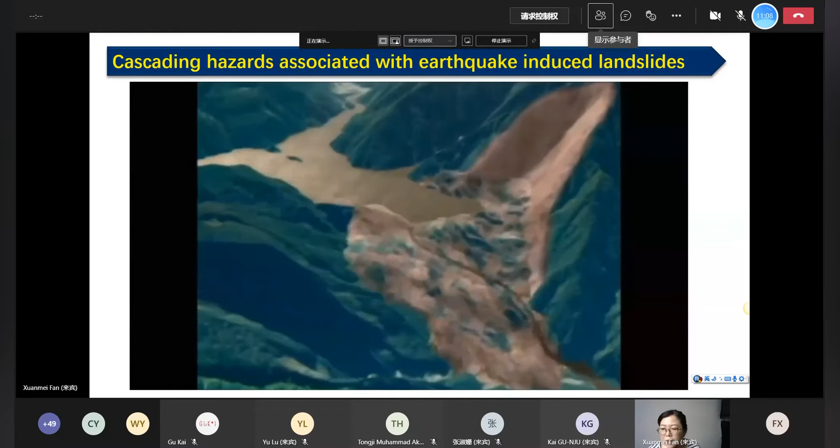Some of the landslides in the vicinity of rivers can trigger landslide dams. These dams are quite weak, especially when dam breaking occurs, causing problems. This is just a piece of animation to give you a direct feeling of this type of earthquake-induced chains of geological hazards. Some landslides in the vicinity of rivers can block the river and form landslide dams, and these dams can fail, especially during heavy rain, causing further flooding.

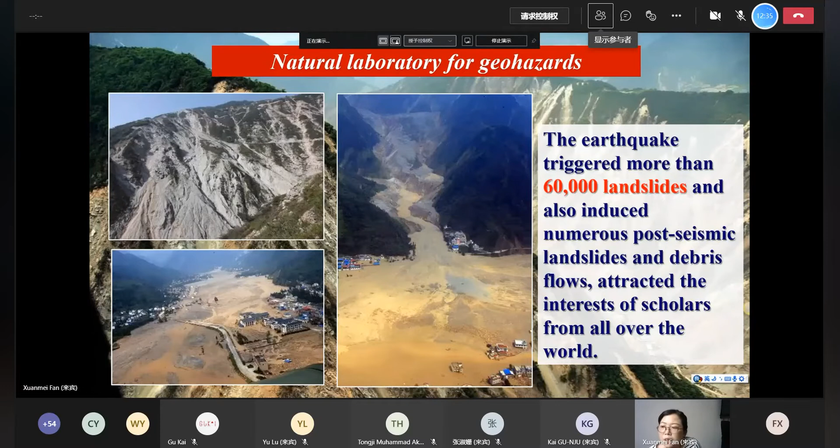This slide shows the situation of the 2008 Wenchuan earthquake. This earthquake occurred in 2008 in the southwest part of China, with magnitude 7.9. It killed about 87,000 people, and 1/3 of the total death toll was actually caused by landslides and secondary geological hazards. This earthquake triggered more than 60,000 landslides and also induced numerous post-seismic landslides and debris flows. That's why it has attracted attention from all over the world.

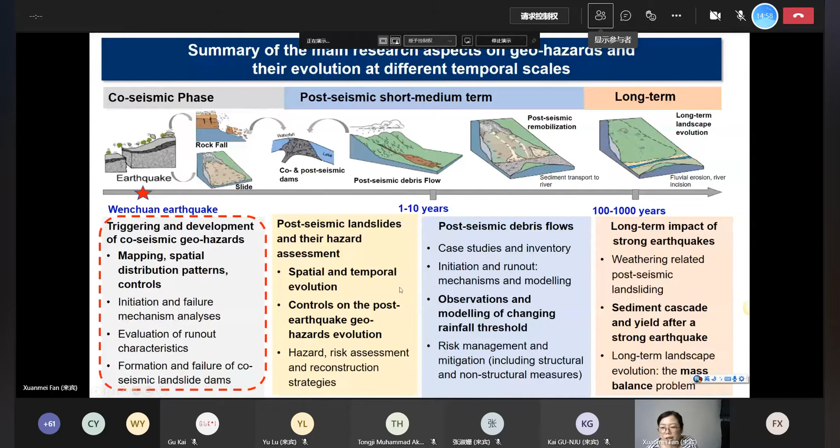Since 2008, I have been working on the chains of geological hazards, and I summarized it here. First, we were working on coseismic landslides. By coseismic, I mean when the earthquake happened, it simultaneously triggers some geological hazards. So we did an inventory and analyzed the spatial distribution pattern and their controls. After that, we moved along the timeline to post-seismic landslides and post-seismic debris flows. I will give you a short overview of all these stages in the coming slides.

First of all, we are trying to understand why an earthquake can cause so many landslides and what is the spatial distribution pattern of these landslides. We found there are 3 types of controlling factors. The first is seismic factors: distance to fault, fault type, hanging wall effect, and footwall effect. These factors are important, along with terrain factors like slope and internal relief. Geological factors include lithology, soil type, and geological structure. And hydrological factors are extremely important for landslide dams.

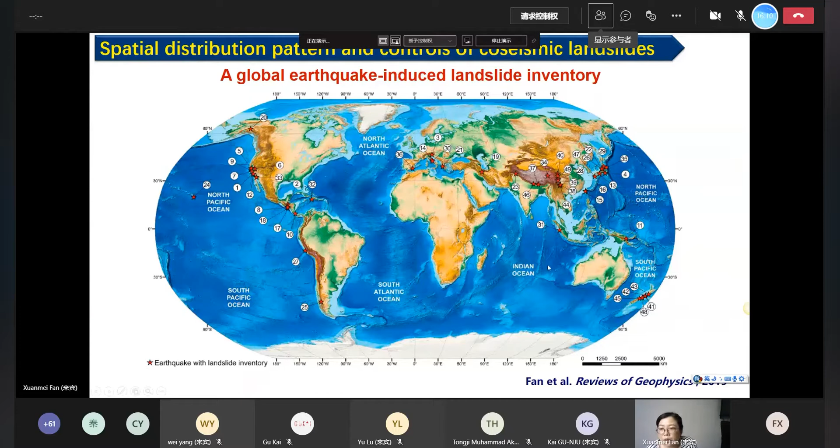And we also further created an inventory for global earthquake-induced landslides. This inventory includes 49 earthquake-induced landslide events, and this is publicly shared with the USGS data repository.

And based on this global earthquake inventory, we further analyzed and we found some general rules for earthquake-induced landslide spatial distribution. As you can see from here, most of landslides actually are concentrated on the hanging wall of the thrusting fault. And it also has a very strong distance effect. Within 5 kilometers of the fault, the landslide density is highest, and with increasing distance to the fault, the landslide density decreases.

And we further developed a model to predict, when an earthquake happens, where the landslides will most probably be. This model used artificial intelligence methods based on this global earthquake-induced landslide inventory. To give you a quick summary of this model: anywhere an earthquake happens, we can quickly predict where the landslides are most probably going to happen.

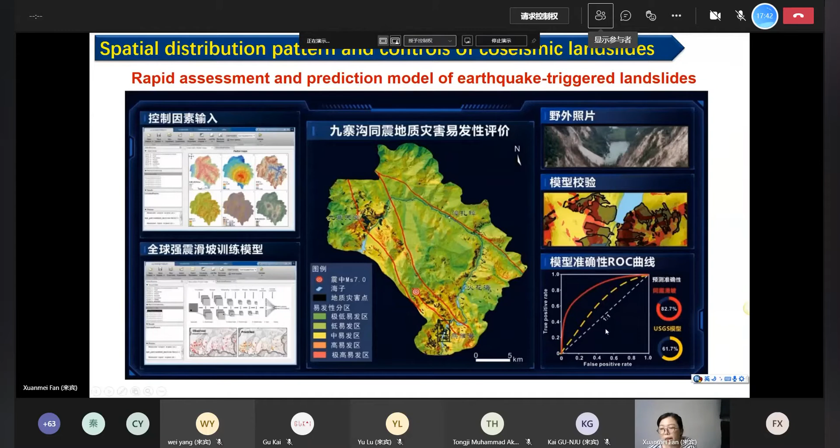This figure shows that after the Jiuzhaigou earthquake, we did a quick prediction of co-seismic landslides, and the model did quite a good job predicting the location of co-seismic landslides. Moving from the co-seismic stage to the post-seismic stage, after the earthquake, our government is facing serious problems with post-seismic landslides and also debris flows.

So the key research questions we are trying to address here are how to quantify the evolution of post-seismic geological hazards, understand the pattern and trend of that evolution, find the possible controlling factors, and also create prediction models for future landslide hazards in the region.

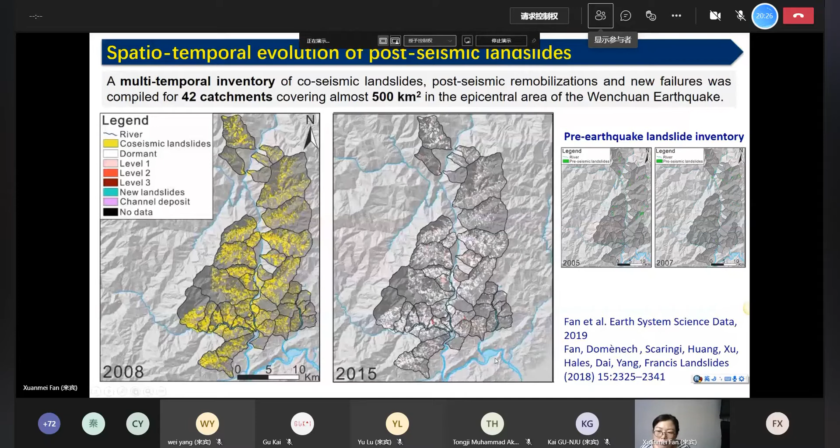And we did this again for 2015, 2017, and 2020. I did not show the other inventories. We also mapped the pre-earthquake landslides, 2005 and 2007, for comparison. If I plot all these inventories as volume density, you can see before the earthquake this region had quite low landslide density, and this is the coseismic, earthquake-induced landslide density. After that, the density decreases, and by 2020 the landslide density seems to have already returned to the pre-earthquake level.

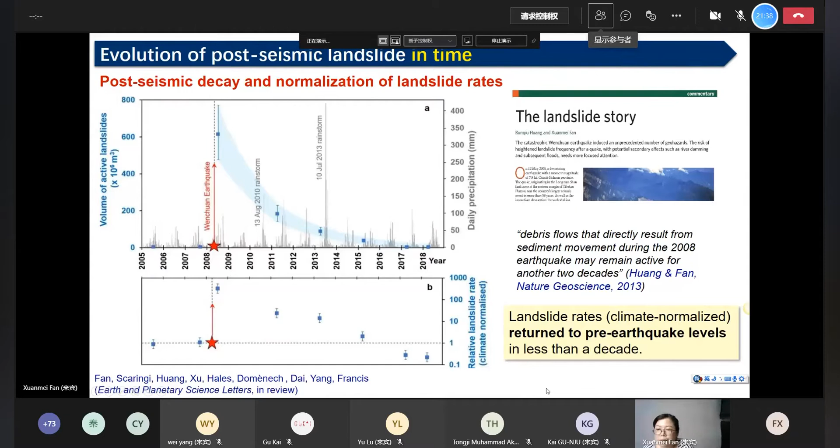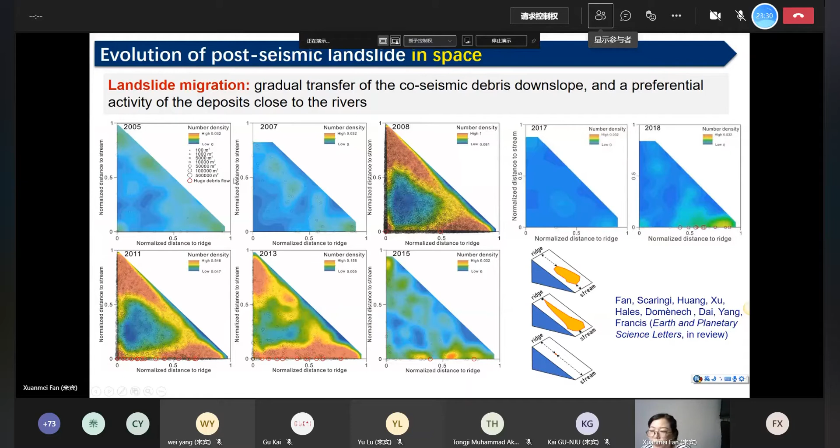So we are trying to understand why the landslide activity decayed very quickly after the earthquake, let's say within 10 years, it already returned to the pre-earthquake level. And we found one of the controlling factors is what we call grain size coarsening. So we found some field evidence.

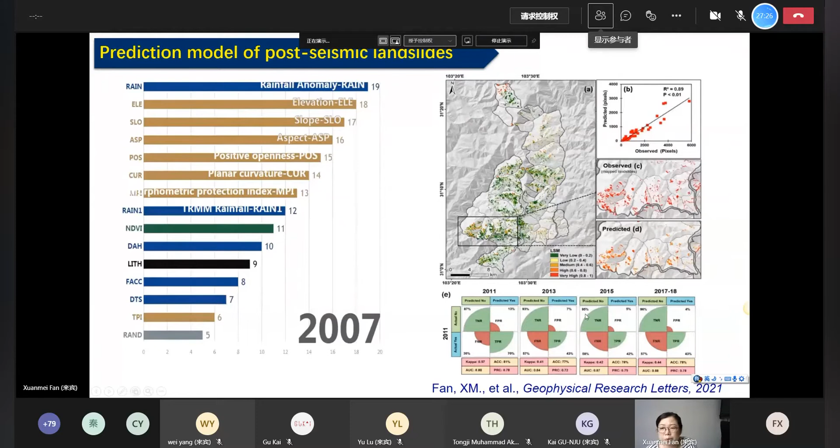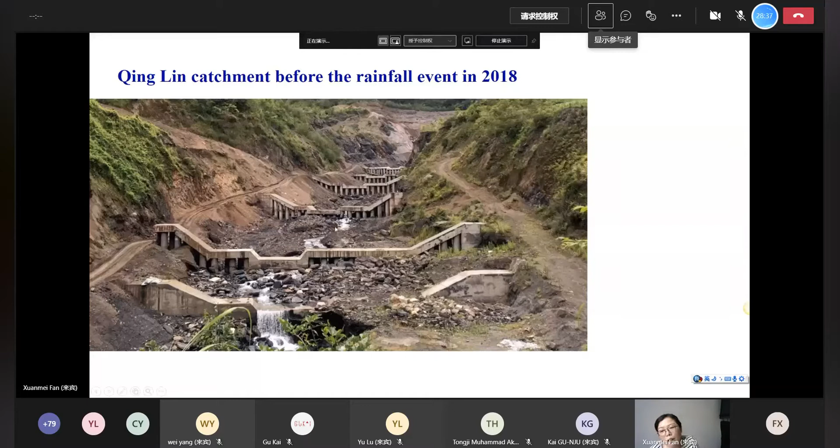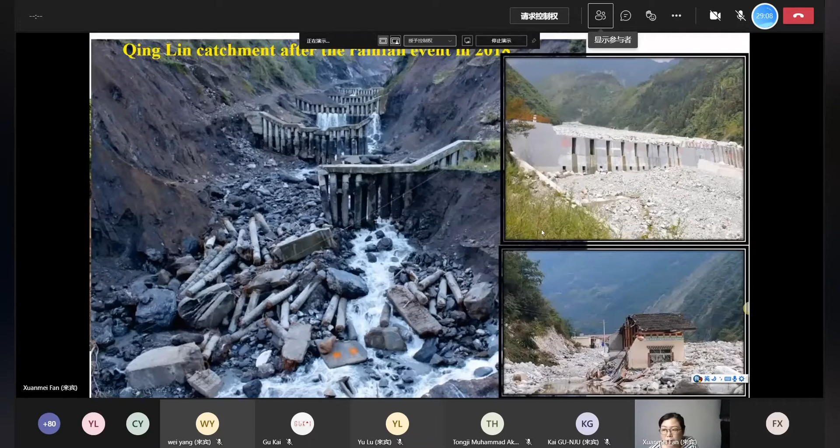So from this, you may have a feeling that we probably underestimated the activity and the magnitude of these debris flows in the first few years after the earthquake when we started designing these mitigation works.

And one of the reasons is, if we do a sediment budget analysis, we found that actually more than 85% of the co-seismic landslide deposits are still in the mountain regions. So that means in the past 12 years, the already occurred debris flow sediment transport only transported about 10% of the deposits outside of the catchment into the Minjiang River, and 5% are actually stored in the channel, and about 80% are on the hill slope. So that's why we still have debris flow activities continuing longer than post-seismic landslides.

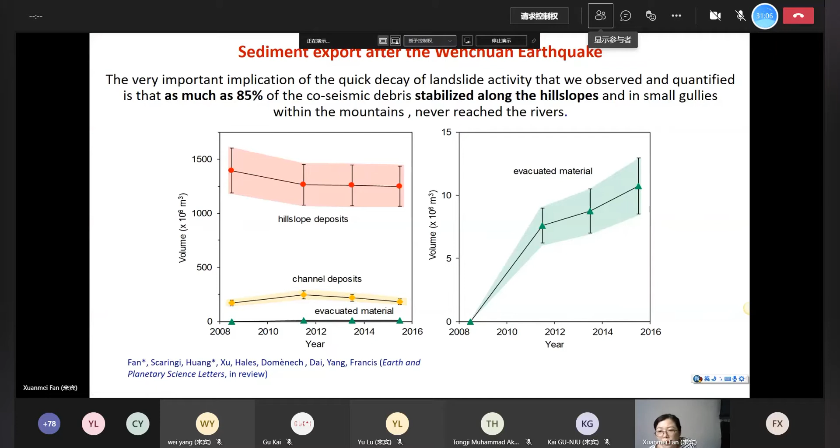And for this model, we also shared our codes. It was developed based on the PCRaster open access platform. So if you are interested in debris flow simulation, especially in the post-earthquake situation, you are welcome to check the paper and download the codes to run it in your own area.

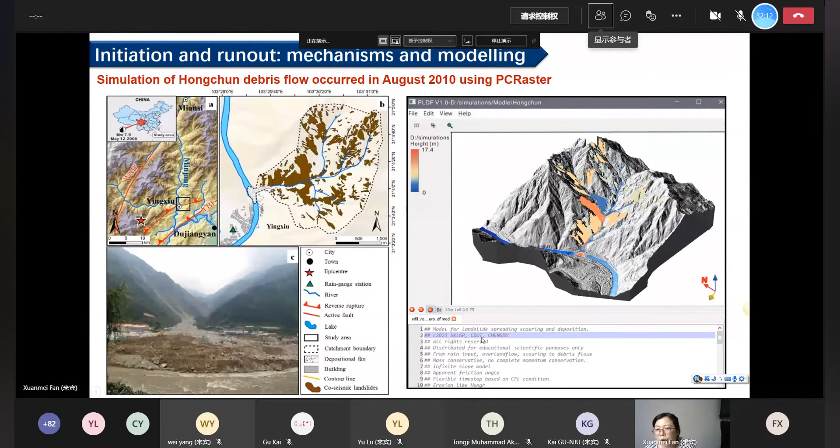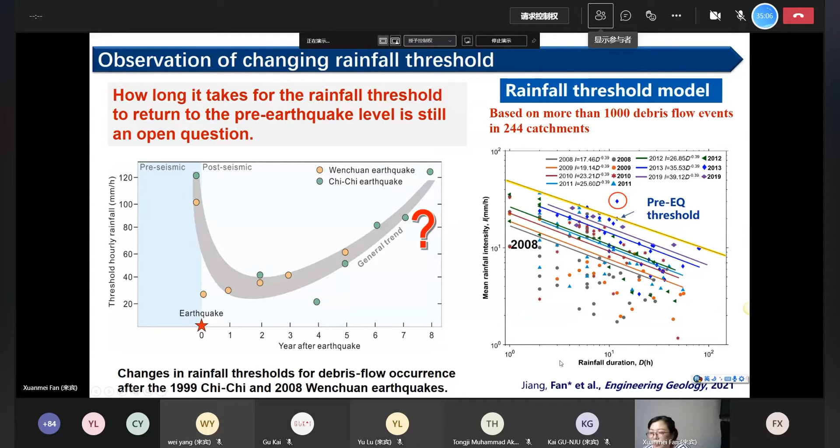The reason is after the earthquake in 2008, the debris flow rainfall threshold reduced to here, and then with time it is increasing. But so far it has not yet returned completely to the pre-earthquake level. So on one side we still have quite a lot of deposits in the mountain regions, and on the other side the rainfall threshold has still not yet returned to the pre-earthquake level. So that's why we will continue to have debris flows in the earthquake region probably for another 10 years or even longer.

So that's all I want to present today, and just to give you a quick summary of the recommendations for future directions. I also summarized all this study in the paper we published in Reviews of Geophysics in 2019. If you are interested in this part, you can also check that paper. So we think the challenge for the future is to understand the interaction between different types of hazards. The chain of geological hazards always involves different types of hazards. So trying to understand their interaction and quantify the interaction is very important.

And for the quantification of post-seismic landslide inventory in time, space, and magnitude, we already did fieldwork on this. But the future challenge is to better analyze the controlling factors, and also to do it for more earthquakes, because we built our model mainly based on the Wenchuan earthquake, and we hope in the future to look into more earthquakes globally.

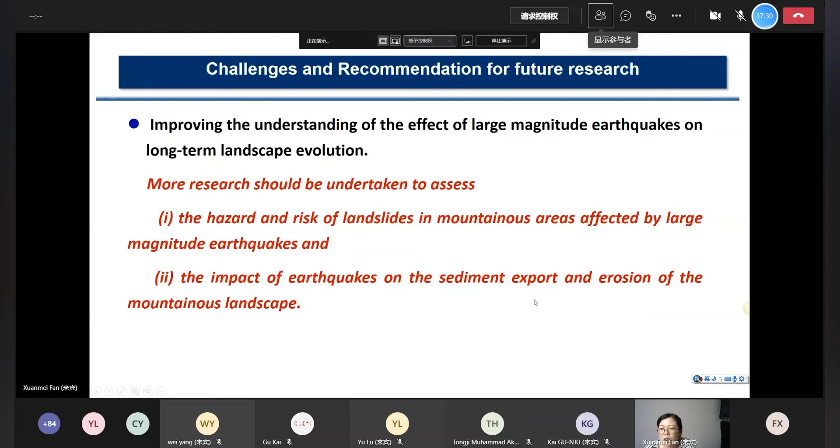And then the other thing is about trying to create a better model to understand hazard and risk evolving after the earthquake, and trying to apply it in different regions. And then for the long-term impact, we need to create a model together with the geomorphic evolution, trying to understand how the sediment transport affects the long-term landscape evolution.

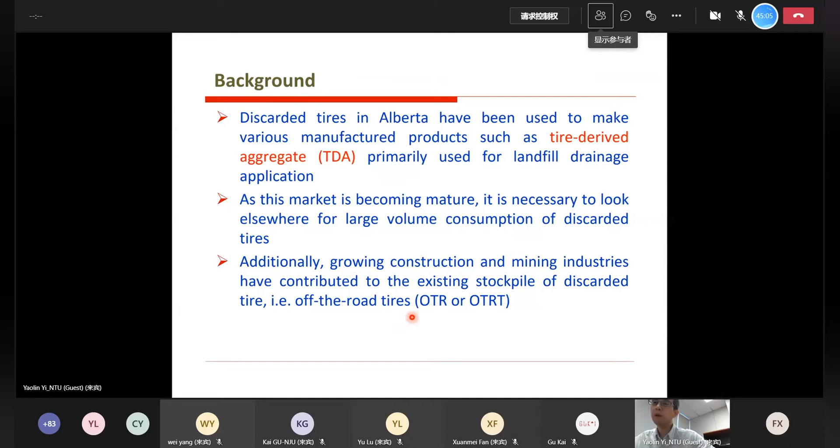And especially in Alberta, we have some special types of discarded tires. Usually tires are for cars or trucks, but if you know Alberta, it's very famous for oil sands. So there are special types of tires from the heavy machinery, so it's kind of different. We also focus on this different type of tire we call off-the-road tires, because it's not used on the road. It's for the oil sand industry. So we call it OTR or OTRT.

The application is not new, but there are still some advantages. First, it can consume large quantities of discarded tires, and it can also reduce use of conventional mineral aggregates, with very low risk of catching fire, because in this application we bury the tires underground.

Also for civil engineering, TDA is lightweight, because the unit weight or specific gravity is around 1/3 to half of conventional aggregate. It can be cost effective because it's made from waste materials. But of course, it depends on the location. If the transportation is too far, it's not that cost effective.

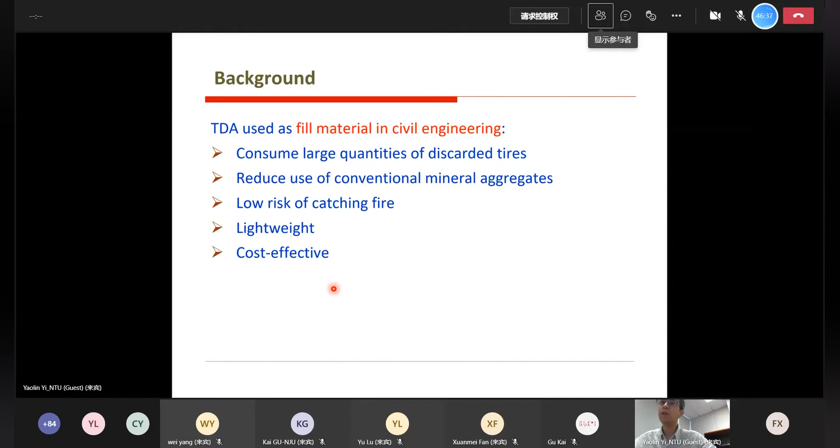The problem we focus on is compression. As you saw in the picture I showed before, this material is very loose, so it will induce very high compression under loading in civil engineering. This behavior actually governs its design and performance. So how to do this? Similar to soil, we usually use a one-dimensional compression test to study the compression behavior, and then we can use it to estimate the compression in the field.

Previous results indicated that the size affects a lot. So if you want to do the compression test, you need a very big compression mold, and the loading method is also different. So our research focuses on the effect of particle size, loading method, and initial void ratio on the compression behavior of TDA. The question is simple: is it possible to use small-scale laboratory tests on small-sized TDA to estimate the compression of large-sized TDA? It's practical, because we cannot always do very large laboratory tests to calculate field results.

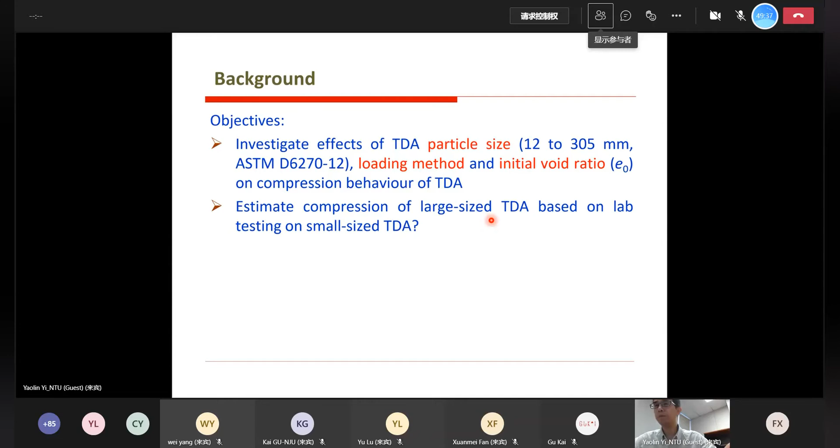Now I'm going to introduce the experiments. We did three types of compression test. One is a relatively small-scale laboratory test using small-sized TDA. Second, a large-scale laboratory test using the same TDA as in the field. And the third is a full-scale field test with very large-sized TDA. We want to compare the results from the three types of test to see if there's something in common, and if it's possible to use a relatively small-scale test to predict the compression at large scale. That's the objective of this research.

As I mentioned, we focus on many particle size, initial void ratio or unit weight, and test method. Additionally, in our study we also investigate a special type of tire source, we call it OTR.

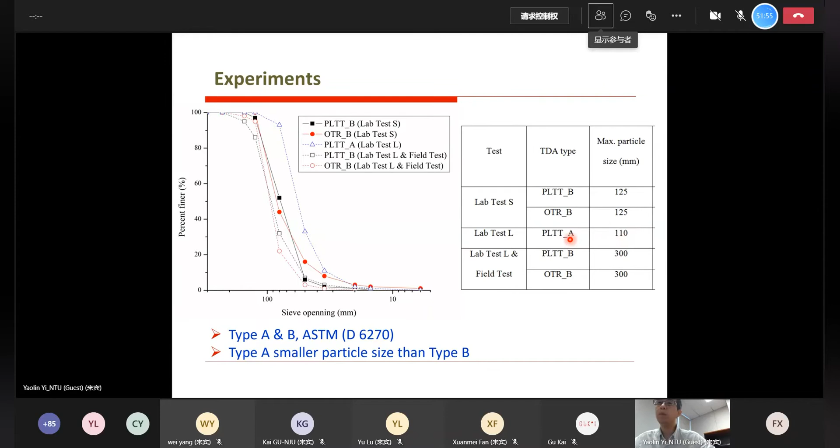These are the particle size distributions of the materials. Generally, we try different sizes of materials. One we call type A, which has a very small size, and the second one we call type B. In the small scale laboratory test we use small sized material, and in the field test or large scale laboratory test we use large size. But additionally, we also test on a very small size, type A, shown here as the blue line.

For the small scale laboratory test shown here, it's not actually small compared with the oedometer test, because the diameter is around 0.6 meter and the height is 1.12 meters. Actually quite big, but compared to the next one I'm going to introduce, this is relatively small. For this small scale test, we use particle size with a maximum of 125 millimeters, so the diameter is more than 4 times the largest particle size.

For the loading, we use different load increments. We apply it immediately and then maintain it until the deformation was steady. We don't have water in it, so it's different from the consolidation test for soil. As I mentioned, we focus on different initial void ratio or unit weights.

For the large scale test, it's quite large. The diameter is 1.23 meter, and the height is 1.5 meter, and the maximum particle size is 300 millimeter. We use exactly the same materials as in the field. The loading method is different here, we do not use load increments. We use a constant deformation rate of 13 millimeter per minute. Remember, the loading methods are different.

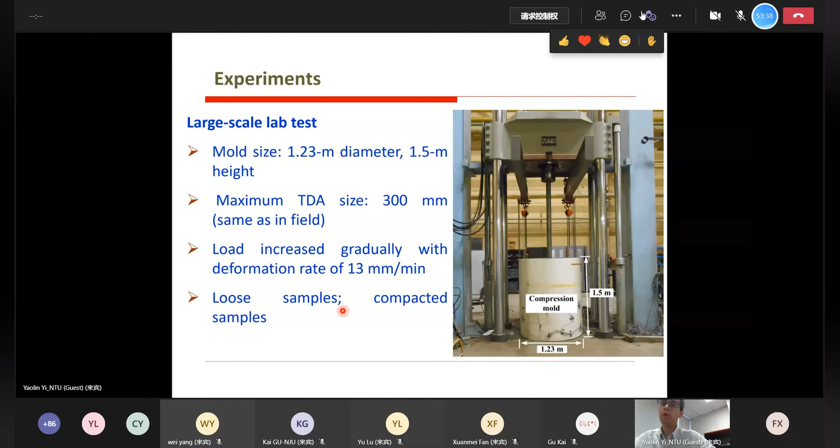Because it's quite large, we only tested two types of sample: one loose sample, and one compacted sample. This picture shows how large it is. This is a PhD student working on this test. Actually, as far as I know, it was the largest one in the world, because for one sample we used almost 1 ton of TDA. So it's not convenient to do this large scale compression test.

The third one is the field test. We did a very big excavation pit. The depth is 8 meters, the width is 17 meters on the bottom, and on the top it's 40 meters. Actually, this is a pilot project, it was for a highway embankment construction. We use this lightweight fill material.

One thing I want to mention is that the native soil is actually very good, quite stiff, so the deformation is actually very small, especially since we replace it with lightweight material. So the deformation below, in the native ground, is actually very small.

For the construction, first we do excavation, then spread the TDAs, then compaction, and construct layer by layer. During this process, we have 2 layers of TDA, and in between we have 1 layer of compacted soil to separate it. For the lower layer, the bottom layer, we measure the vertical pressures as well as the deformation. So we can compare the stress and strain behavior of the 3 types of tests: small scale laboratory test, large scale laboratory test, as well as field test.

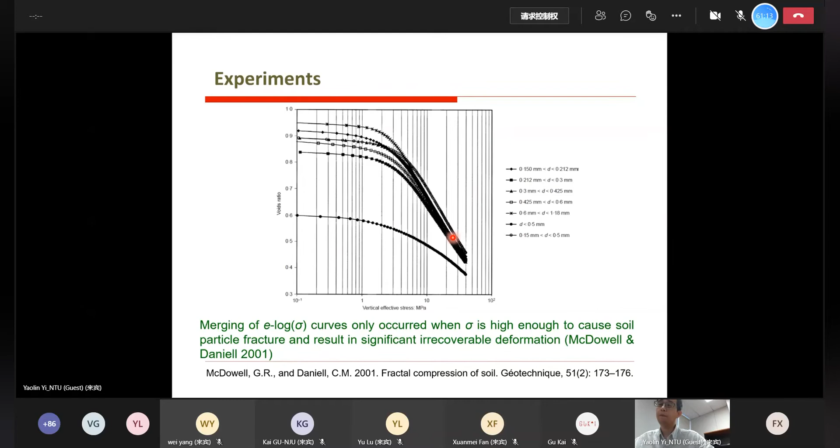This is because we have very high content of plastic strain, but for the TDA, most of the deformation is elastic, and they merge much better compared to here. And for clay, again it looks like they try to match, but not exactly, unless we use normalized void ratio. So the finding means that the compression behavior of TDA is simpler compared to soil, compared to sand, compared to clay. So it may be possible we can come up with a simple method to estimate the vertical deformation, the compression, maybe using small-scale laboratory tests to predict the compression for large-scale as well as field-scale compression.

So in order to do this, we calculate the compression modulus, because this parameter is commonly used for compression calculation. We calculate the compression modulus for very small load increments using this equation, quite a simple equation. And I said it seems that the void ratio is the dominant factor, so we plot the compression modulus against the void ratio.

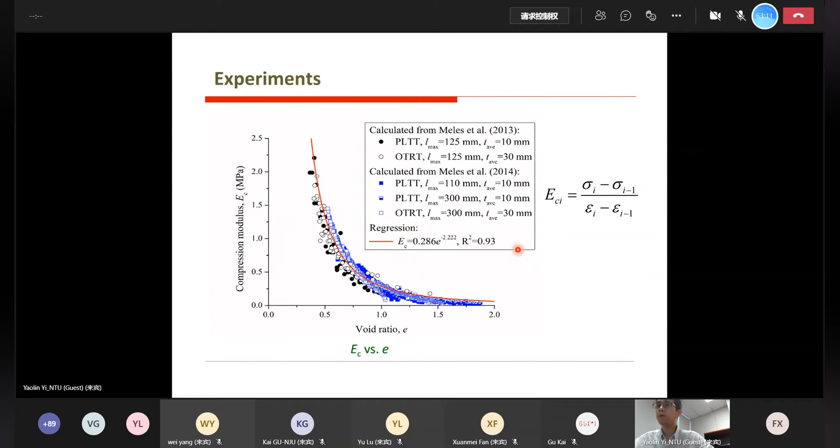What's interesting is that all the points actually try to follow the same line, the same curve. This means different scales of tests with different materials and different particle sizes actually follow the same compression law. So for example, if we know this function based on some laboratory test, we can simply estimate the compression. The third part is about the validation of this assumption.

The method is very simple. Assume that based on small-scale laboratory tests, we can do regression and get this curve, this function, in terms of compression modulus and the void ratio.

If we assume the loading is very slow, we can divide the loading process into very small increments. For each increment, we calculate the compression modulus based on the void ratio, since we know the initial void ratio. We start from the first load increment to the last, modifying the modulus according to the corrected void ratio, starting from 0 kPa loading to whatever you want.

To verify this assumption, we used three samples of small-scale laboratory tests on PLTT, the three curves I showed before, and did regression. The R-square is not too high but not too bad, 0.94. Based on this function, we tried to predict the results for other tests I showed before.

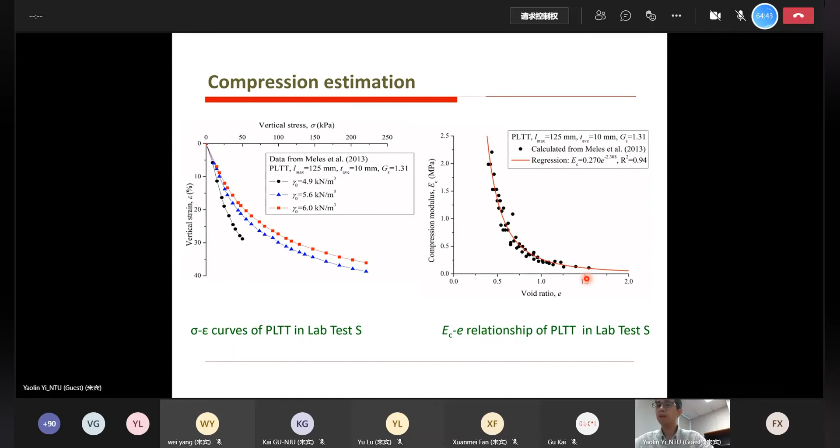We then tried to predict the large scale laboratory test, and again all results are quite good. The difference between large scale and small scale laboratory tests is that they have different TDA thickness, length, and width, so material particle size is quite different. Second, the mold sizes are different, and the sample preparation methods are also different. Loading methods are also different—one uses load increment, the other uses constant loading rate.

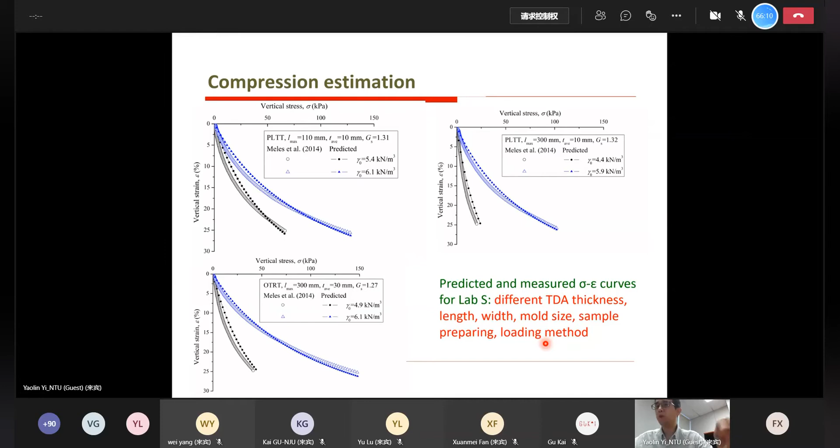This means we can use results from small scale laboratory tests to predict results for large scale laboratory tests. We also tried to do prediction for results published by other researchers. As long as we know the initial void ratio accurately, the results are not too bad.

We also tried to verify the result with field tests, which was not as good compared to the previous results. The reason is that in the field we did not know the initial void ratio accurately—we only had estimated numbers because we didn't know the whole volume of excavation accurately, nor the whole mass. We measured some of it, but there's very high variation, which is a major reason the prediction is not as good as before.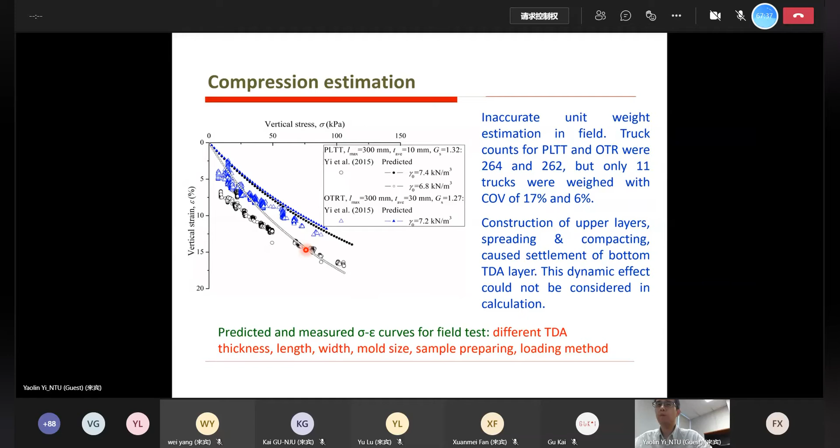But overall, for civil engineering applications, I think it's okay since the difference is between 10% to 20%. So this actually answers our question: it is possible for this special type of material to use small-scale laboratory compression tests to predict results for large scale, field-scale applications.

Now I'll summarize some conclusions. First, the compressibility of TDA is primarily dominated by the initial void ratio, while particle size and loading method have much less influence compared to void ratio. This is because this material is quite different from soil—it's a very elastic material since the particles are rubber, so it deforms easily, and the clogging interlock between particles is quite small.

Second, all different types of TDA samples we studied have almost the same compression modulus and void ratio relationship, regardless of initial void ratio, particle size, and loading method. This is very useful for practice—we can use this to estimate the compression of large size TDA based on results from small size TDA in the laboratory, so it's possible to apply this method for design.

For field application, one important point is that we need to measure the initial void ratio or unit weight accurately; otherwise the prediction won't be very accurate. That's all for my presentation. These are some colleagues and organizations I want to acknowledge. That's all.

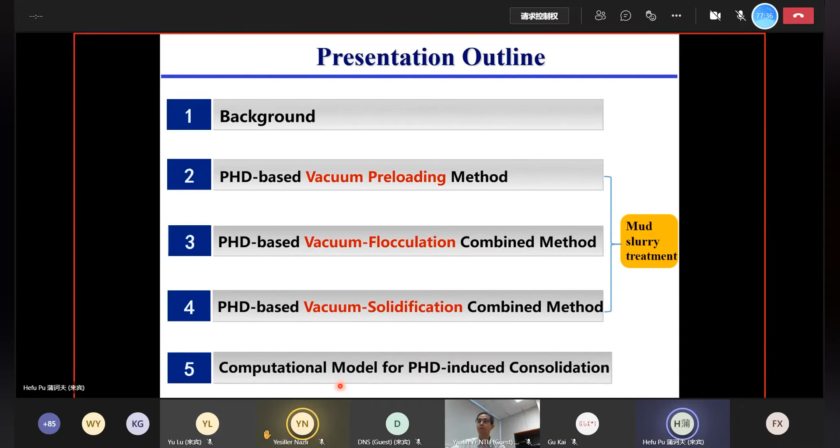All these three methods are similar. They all use PHDs to facilitate the vacuum preloading. And lastly, I will also introduce a computational model that we developed to predict the behavior of PHD vacuum-induced consolidation.

So first, some background. Each year, a huge volume of dredged mud slurries are produced worldwide due to different kinds of dredgings in aquatic environments, for example, in lakes or in rivers, in ports, in reservoirs, and in seas. And it is estimated that several hundred million tons of such slurries are produced each year. So it's a huge volume.

And the dredging can be for different purposes. Some is, for instance, the deepening or widening of navigational channels. Some is for environmental remediations. Anyhow, there are lots of dredgings going on, and they produce lots of waste slurry.

And these dredged mud slurries exhibit poor engineering properties. For example, it has very high water content. Usually the water content exceeds 200%, and sometimes it's higher than 300, 400, or even 500%. So it's several times the liquid limit. So it's actually in a slurry state. It's not really a soil, it's more like a mud slurry. It's more like liquid. And because of its high water content, it's usually in a loose state.

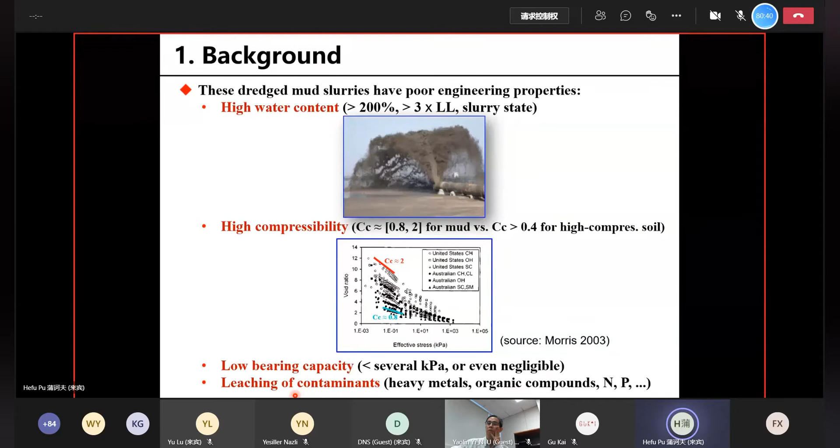So we have this kind of high water content mud slurry. The best way to handle it is to come up with some treatment methods and transform the mud slurry into some kind of materials for beneficial reuse. For example, we can turn it into fill materials for construction, for instance, embankments or levees or dams, etc. We can also make some bricks for pavement, for example, and also people have tried to make ceramsites. And the key for the treatment here is how we can reduce the water content effectively and efficiently.

And there are many methods out there to treat the high water content mud slurry. One commonly used is the prefabricated vertical drain, the PVD-based vacuum preloading method. This method has been used for many years in conventional geotechnical engineering for soft ground improvement. And more recently, people have started to use it for mud slurry dewatering.

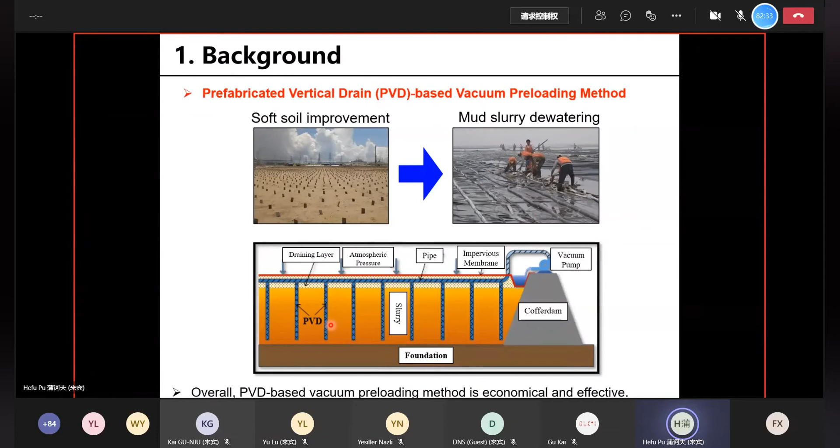So the idea is simple. We simply insert the PVDs, the vertical drains, into the ground, and then connect the PVDs with vacuum pumps, and then we apply a vacuum pressure, and the vacuum pressure can suck out the water and reduce the water content. And overall, the PVD-based vacuum preloading method is economic and effective, but still there are many issues that need to be solved when using PVDs.

The first issue is that, as I mentioned earlier, the mud slurry has very high water content. That means it has very low bearing capacity. So in the very beginning, the personnel and equipment cannot access the construction site. They may even sink into the slurry. So usually there is a very long, time-consuming pre-treatment before those PVDs, those vertical drains, can be inserted into the ground.

The pre-treatment includes some drying or sometimes self-weight deposition or consolidation, depending on the method used and depending on the scale of the construction site. The pre-treatment can be very long, sometimes months or even years.

Another issue is that the PVDs can be severely bent because the mud is very soft. After the treatment, after the consolidation, there will be a significant deformation, and because of that, the PVDs will be severely bent, and that can cause a decrease in the transfer of vacuum pressure, and therefore a decrease in the dewatering efficiency.

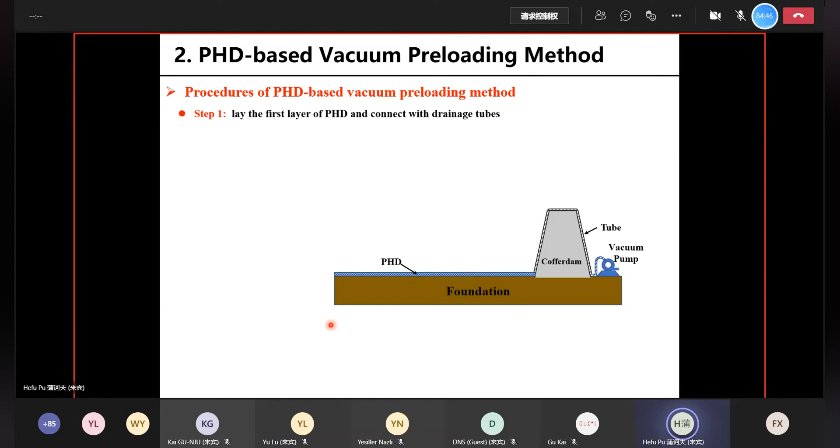First, let me show you the procedures of the PHD-based vacuum preloading method. So first, we need to lay the first layer of PHD at the bottom of the disposal site and connect the PHD with drainage tubes and with vacuum pumps. And then we fill the mud slurry into the disposal site and then start the vacuum preloading to dewater the

slurry. And after that, we lay the next layer of PHD, and after that, we continue to place the mud slurry into the disposal site and then start the vacuum pump to pump out water. So we repeat this process over and over again until all the mud slurry is placed into the disposal site. So conceptually, it is easy. We simply replace a vertical drain with horizontal drain, but the benefits are

as follows. First, the PHDs are placed before the mud slurry is filled into the disposal site. And because of that, the time-consuming pre-treatment is no longer needed. That alone can save months or even years of time. And secondly, because the PHDs are placed earlier, we can do the filling and also the dewatering of the mud slurry

simultaneously. Namely, as we place the mud slurry into the disposal site, at the same time, we can dewater the mud slurry, so we don't need to wait. And because of that, the overall dewatering efficiency is significantly increased. And thirdly, when we use PHDs, the horizontal drains, we will not have significant bending because the drain board will settle together with the soil, with the mud. And therefore, the vacuum transfer efficiency of PHD will be better than that of PVDs.

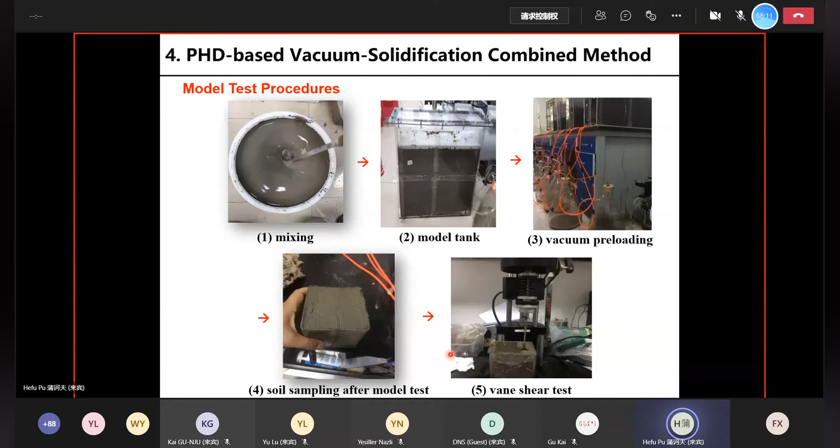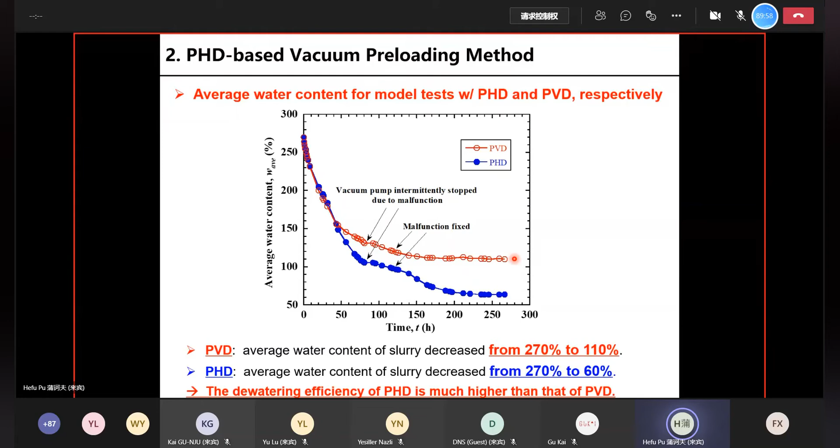We'll also look at the average water content for the model tests with PHD and with PVD respectively. We can see that for the PVD, which is the red curve, the average water content of the slurry decreased from initially 270% to eventually 110%. And for the PHD, which is the blue curve, the decrease of water content is more significant. The final water content is only 60%, which is roughly about 1/2 of that for the PVD. So we can see that the dewatering efficiency of PHD is much higher than that of PVD.

Later, we also used this PHD-based vacuum method and combined it with other types of chemicals, for instance, with flocculant. This is a part of the model test program. We have 6 different groups of tests with different APAM content. APAM is short for anionic polyacrylamide, which is a common type of flocculant that has been commonly used for water treatment. And in recent years, people have also begun to use this for mud treatment

because APAM is a polymer material. They have very long chains, and these long chains have bridging effects that can bring all the small particles together to form large flocs. And when you have large flocs, those large flocs can make the soil particles settle much faster. And also you will have a larger pore size, which means the water can flow through the soil more easily. And because of that, when you combine this with vacuum, you have a much easier dewatering effect.

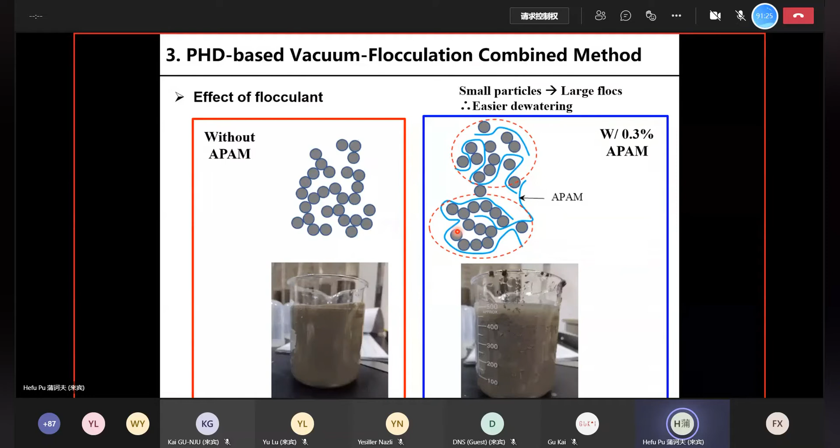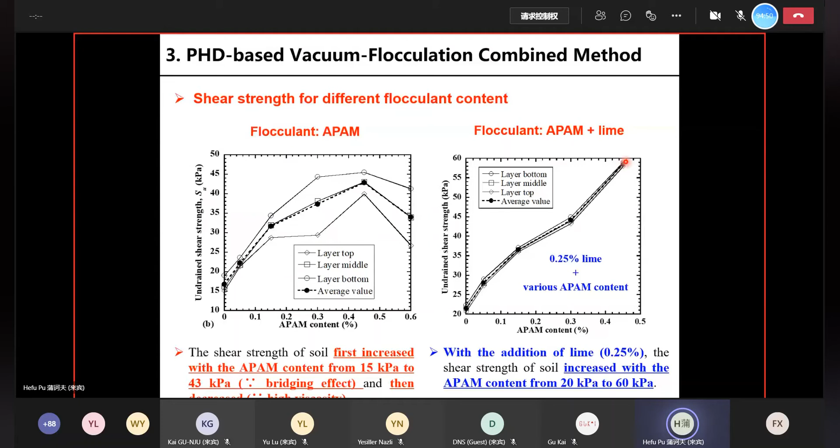So in section 4, I will present a PHD-based vacuum and solidification combined method for mud treatment. In this case, on top of the vacuum preloading, we add in a solidifier to further increase the strength. This is the mud slurry that we use. In this section, we test both clean mud and also contaminated mud. For the clean mud, we primarily look at the dewatering efficiency and the mechanical behavior, such as the shear strength. For the contaminated mud, on top of that, we also look at the stabilization effect of the heavy metals.

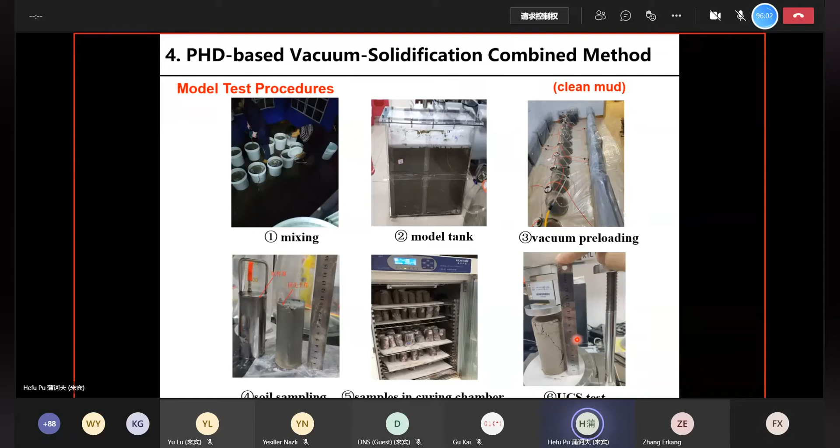This is the test procedure. So again, we first mix the slurry and place the slurry in the model tank. Then we start the vacuum preloading, and after that we take out the soil samples and cure them in a curing chamber, and after that we take them out for other testing. This is the model test program. We have 3 series of tests. In the first case, we use direct solidification. In this case, the mud slurry was solidified at a very high water content without prior dewatering. So as you can imagine, it will have very low strength after the solidification.

So this is average water content versus time for different treatment methods. The black curve on top, that's the direct solidification method. As you can see, the reduction of water content is very small. It went from 300% to 270%. That's because some water is consumed by the cement.

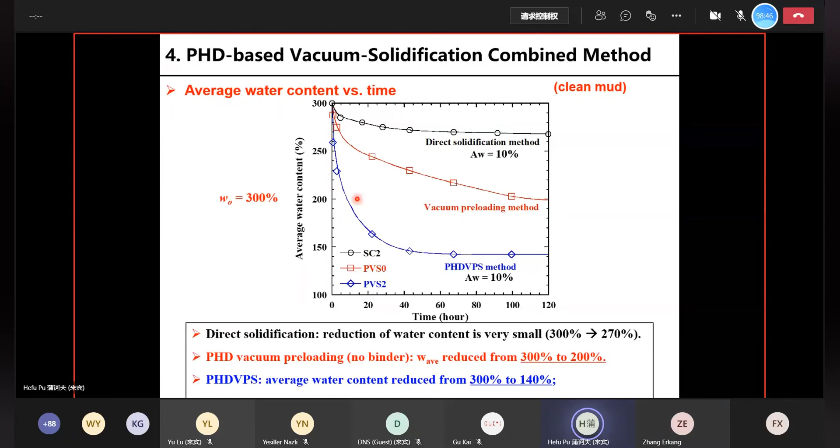The increase of permeability is attributed to the fact that the cement hydration reaction at early times has an effect of flocculation due to the generation of calcium ions, and also the hydrates have some skeleton building effect. It pulls the particles together and increases the pore size, and because of that, at the very beginning, the dewatering efficiency can be improved for vacuum preloading. And because of that, the mud is solidified at a much denser state later on.

We'll also look at the unconfined compressive strength. On the left, you can see the direct solidification method without prior dewatering. We tested different initial water content, and you can see that the solidified strengths decreased significantly with increasing water content from 200% to 400%. So this tells us how important it is to lower the water content for further treatment.

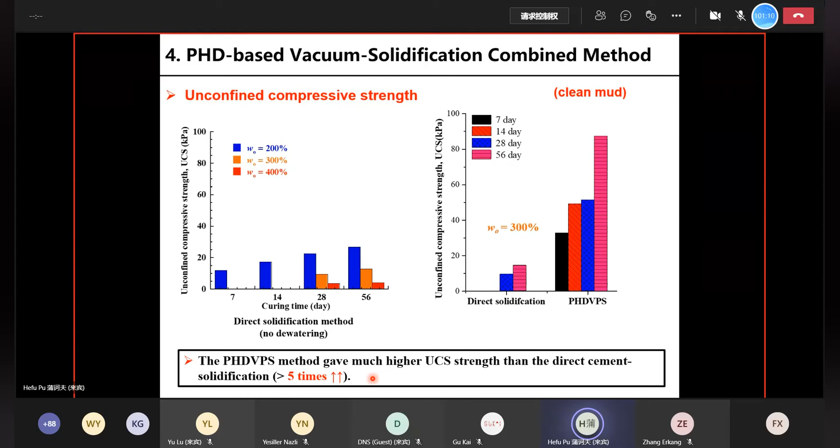Professor Pu, we have 2 minutes left. 2 minutes? Yes. Okay. 2 minutes.

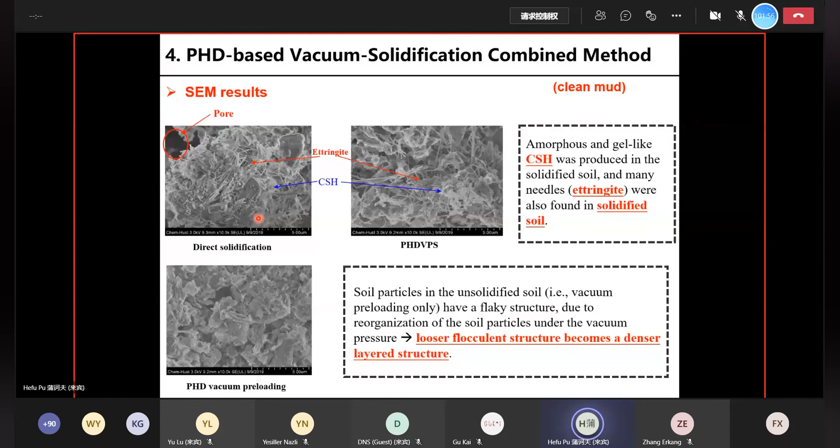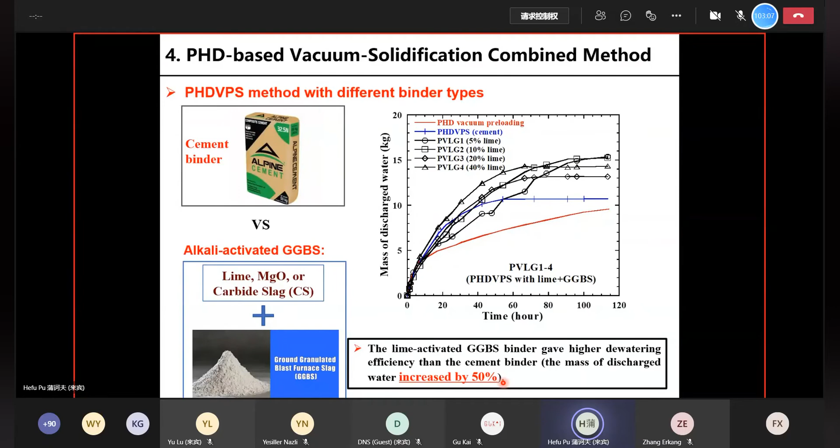This figure shows the mass of discharged water, and the blue curve is for the cement as a binder, and the black curves are for the lime activated GGBS. And you can see that more water was sucked out. The mass of discharged water can be increased by 50% when we replace the cement binder with GGBS binders. And because of that, the strength was also increased significantly.

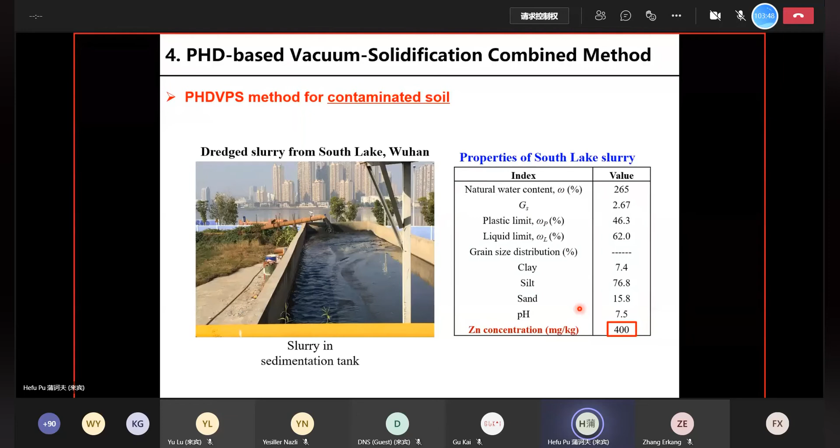The reason is that it caused the change in the speciation of heavy metal. When we treat the mud slurry with the PHD-VPS method, especially when we use MgO and GGBS as a binder, there is less unstable fraction of heavy metal and more stable fraction of the heavy metal. And lastly, I will present some computational model that we developed for PHD-induced consolidation.

When we use this PHD-based vacuum method in the field, we need to decide how we design this PHD, how long we need that, and what is the lateral spacing and vertical spacing of the PHDs, especially when we have complex conditions such as layered soil profiles. We need to design the whole thing, and we need a tool to analyze the change of water content and the change of settlement, so we need a numerical model to analyze the deformation process.

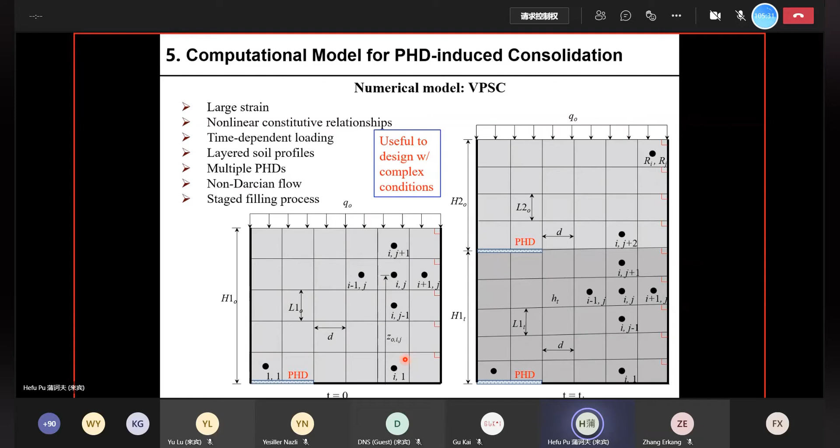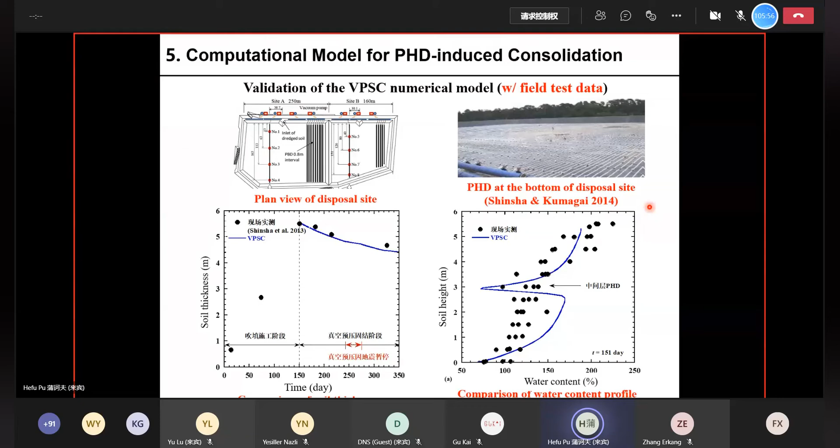We developed a model and validated it by comparing with other analytical solutions, and also with a large-scale field test conducted by Shinsha back in 2014. The numerical model performed well against the field testing data.

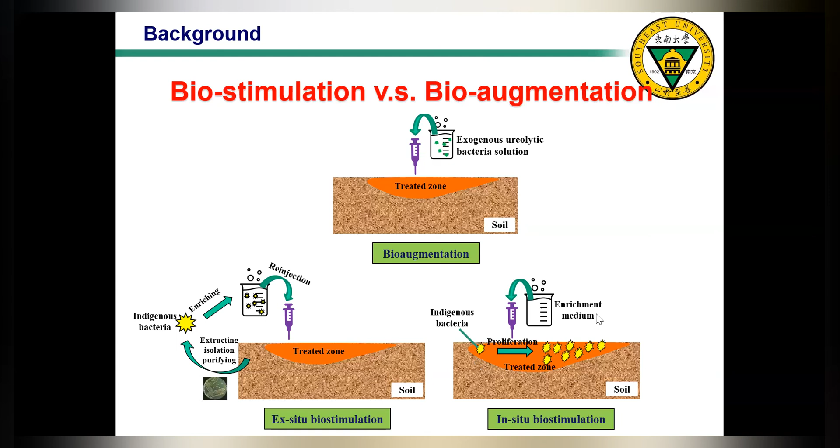Okay, so actually this is a very big project - biostimulated MICP for calcareous sand stabilization. In this big project, we look at three aspects: optimization, performance, and application.

For the optimization, we focus on the phylogenetic characteristics, urease kinetics, and chemical reactions by doing solution batch test, column culture test, and genetic sequencing. For the performance aspect, we characterized the biocementation level, shear strength, and compressibility by doing direct shear test, triaxial shear test, and oedometer test.

Finally, for the application aspect, we focus on ground improvement, coastal erosion control, and heavy metal immobilization by doing 2D tank test and hydraulic flume test. So in today's presentation, I will mainly focus on the first two aspects: optimization and performance.

Okay, so firstly, let's look at the optimization. We performed the solution batch test. The purpose of this test is to find out what are the most significant factors that control the enrichment of indigenous ureolytic bacteria, or stage 1.

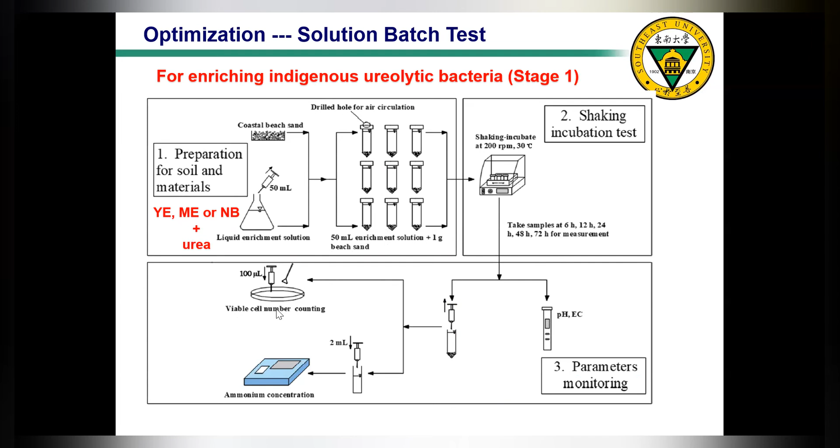In order to further determine the optimized urea concentration and stimulation time, we did the soil column test. It's quite similar to the solution batch test, only difference is that we directly inject the enrichment solution into the soil column, and after a certain period, we take soil samples and measure the urea concentration and ammonium concentration.

So here are the results. Clearly, if we see the black lines and dots, we can see that with the increase in urea concentration, from 50 mM to 100 to 170 mM, the ability of the enriched bacteria to consume urea also becomes higher, meaning the generated ureolytic activity is higher. From this test, we can see that 170 mM, or 100 gram per liter, urea is sufficient to effectively induce biostimulation - enough ureolytic bacteria enriched at this concentration.

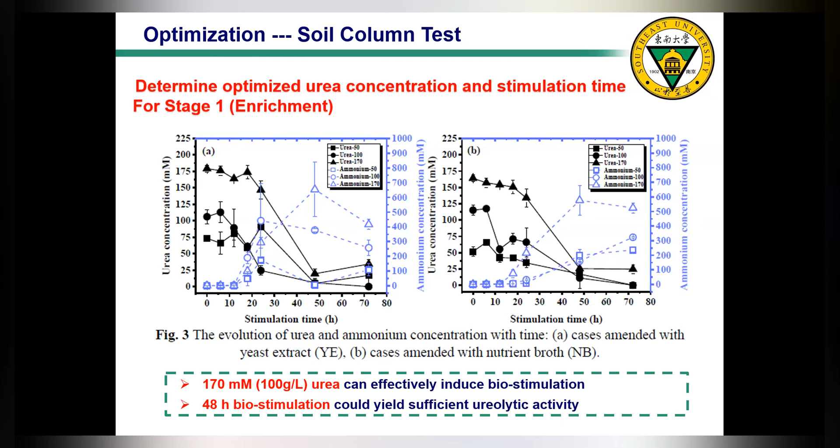So then it comes to the performance aspect. In this part, firstly I would like to introduce the material and testing method. The soil sample again is sourced from Waikiki Beach in Hawaii, because this is a study I performed in Hawaii. Then we prepare the enrichment medium, which contains either yeast extract or nutrient broth and urea.

So this is a composite material. Then we have the cementation solution, which aims to generate biocementation. Within the cementation solution there are calcium, urea, and trace nutrition additives.

For the first 48 hours, the enrichment medium was percolated through the surface of the soil sample to stimulate the growth of the native bacteria, as mentioned - 48 hours is the optimized time we found, and the concentration of urea within the enriched medium is 170 mM.

Then, after 48 hours, we percolated the cementation solution once a day for 5 to 10 days. The aim of this percolation is to generate biocementation at different levels - the longer period of percolation we perform, the higher cementation level we expect.

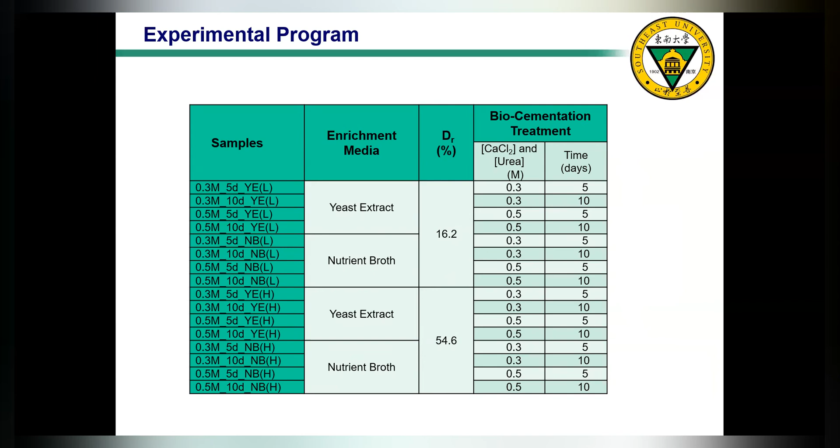We also performed microscopic observation using optical microscopes. In picture A, this is uncemented sand - loose sand without any cementation or bonding between particles. In figure B, this is a low cementation level case; we can see a little bit of interparticle bonding, but not that obvious. However, for the heavily cemented case, with 6.33% cementation, we see quite obvious, wide interparticle bonding or cementation between the sand particles.

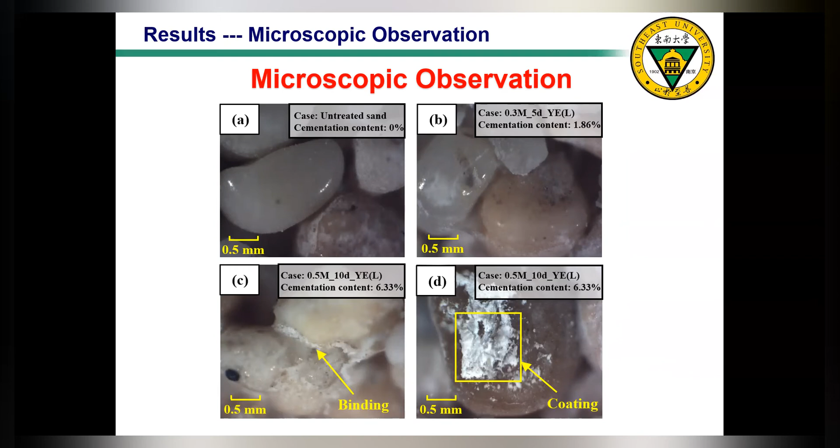Then we systematically summarize the peak stress ratio results and correlate it with the cementation content. The left-hand graph is the low initial density case, and the right-hand graph is the high relative density case. We see that the peak stress ratio increases with cementation content, and this is true for all samples, meaning cementation can help improve shear strength.

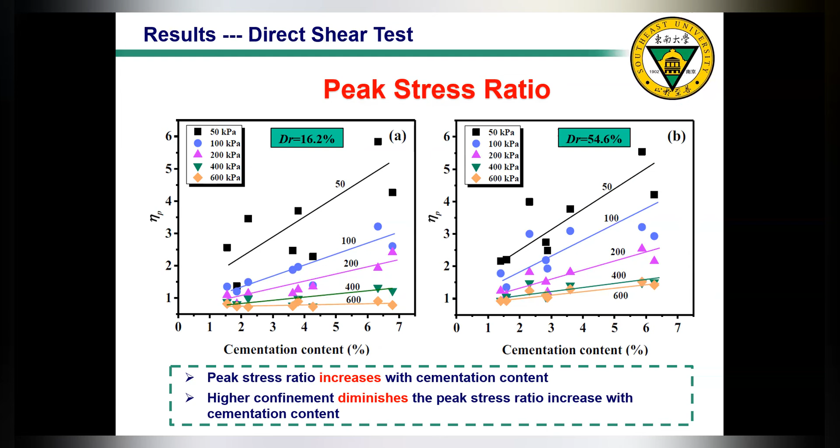So only cohesion is apparently affected. Okay, so next is the CU triaxial shear test, right? On the left-hand graph, that's the picture taken at the end of two CU triaxial shear tests. One is at 400 kPa confining pressure, the other at 50 kPa. At 400 kPa, the high level of confining pressure, we can see a clear shear band. However, for 50 kPa, it's like bulging.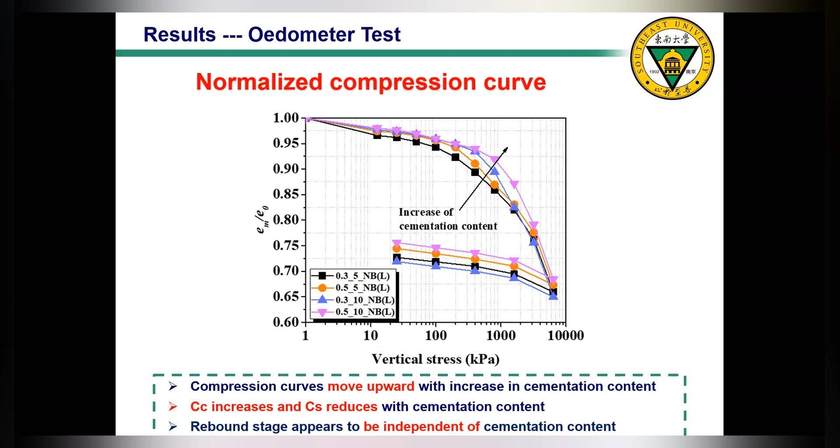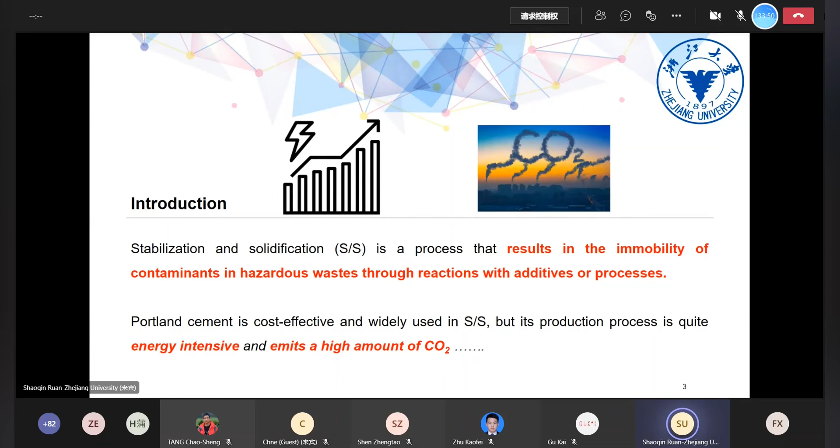Nowadays we try to achieve the goal of carbon neutrality. So if we use too much Portland cement in SS, it is not quite environmentally friendly. So we should search for other materials that are low carbon. And I will show you 2 figures first. First is about the materials flow of ordinary Portland cement manufacturing.

And we all know, first you need to get some raw materials to produce cement. And I know it is quite boring, but I want to introduce this first. You need lime, alumina, silica, and iron oxide. Then you need crushing, grinding, and blending to make the blended mixture. Then the very important procedure, that is the calcination, and you can get some clinkers. Then finally you add some gypsum to Portland cement to produce the commercial products.

And we all know the carbon dioxide emission can be divided into 2 parts. The first part is the direct carbon dioxide emission. The second part is the indirect carbon dioxide emission. The direct carbon dioxide emission comes from the calcination of carbonates, the calcium carbonates. And the indirect carbon dioxide emission comes from the use of fuels. If we use some coal or some natural gas, it will produce some carbon dioxide.

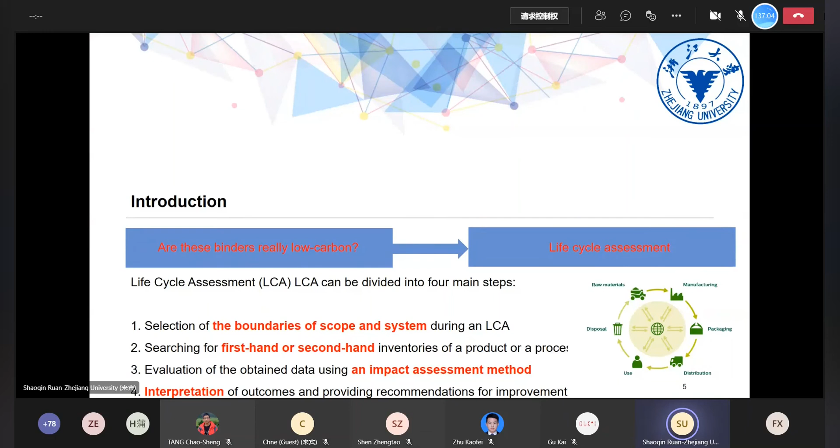Here comes the question. Are these so-called low carbon binders or industrial wastes really low carbon? So here we need to use the very powerful method that we call the life cycle assessment. The life cycle assessment can be divided into 4 parts. The first is the selection of the boundaries of scope and system during an LCA. The second part is searching for first-hand or second-hand inventories of a product or a process. Then there is the evaluation of the obtained data using an impact assessment method. Finally is the interpretation of outcomes and providing recommendations for improvement.

So there are numerous methods that we can use to evaluate the environmental impacts of materials or procedures. The most widely used ones are Eco-indicator 99 or IPCC 2013. Eco-indicator 99 can be divided into several parts, and you can get a number of midpoint categories such as climate change, radiation, and land use, and these environmental categories can be further categorized into 3 groups: damage to human health, damage to ecosystem, or damage to resources. After you get the endpoint results, you can weigh these values, and finally you get the interpretation. IPCC 2013 is usually used to obtain the carbon dioxide emission during the production of certain materials or a certain process.

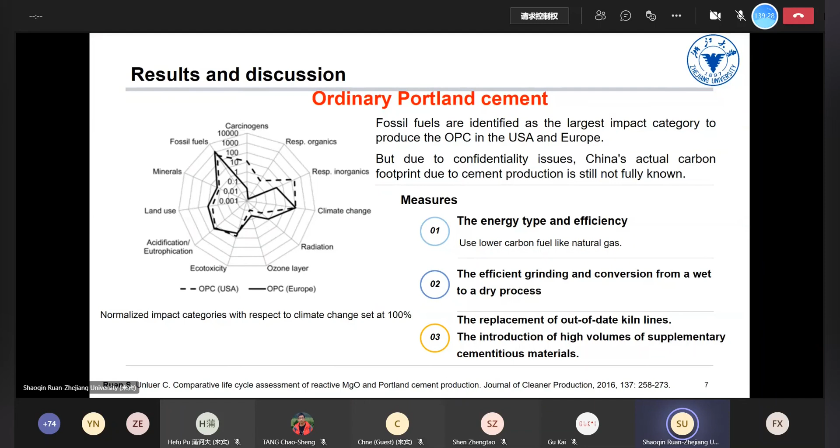Okay, so previous speakers also mentioned binders like alkali-activated cement, and this type of cement is quite popular in my research area. Nowadays, numerous researchers investigate the performance of alkali-activated cement, whether used in concrete or in SS. So I want to give a very brief definition of AAC. Alkali-activated cement is considered to be a more sustainable material than OPC, produced by a reaction between aluminosilicate-rich materials and alkaline activators. In terms of its advantages, AAC shows greater sustainability than OPC, and AAC demands lower energy and carbon footprints.

However, there are some uncertainties. In some cases, AAC may show a higher global warming potential compared with blended cements, which could be related to the production of alkali that consumes a large amount of energy. As we know from the definition, to prepare the alkaline activated cement, you need a large volume of alkaline, and its production process may be energy intensive, which further adds environmental burdens to the whole process.

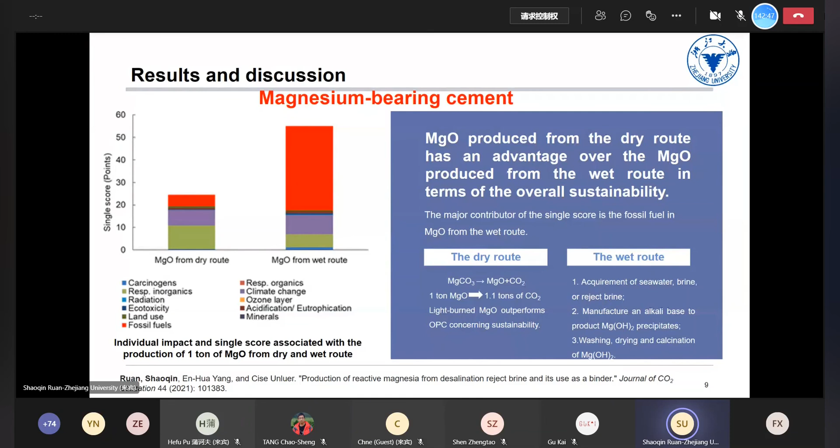There are several types of magnesium-bearing cement, for example, carbonated MgO cement, magnesium silicate hydrate cement, magnesium phosphate cement, magnesium oxychloride cement, and magnesium oxysulfate cement. Magnesium phosphate cement, magnesium oxychloride cement, and magnesium oxysulfate cement all reveal rapid setting and hardening properties, which is quite useful in the process of SS. So they are commonly used in a lot of applications.

First, about the carbonated MgO cement, we published a lot of papers in this area. As we know, MgO cement acquires compressive strength via sequestration of carbon dioxide, which leads to a reduction in pore volume and improvement of the microstructure. The carbon dioxide can be permanently captured in the form of stable hydrated magnesium carbonate. However, the carbon dioxide sequestration potential of MgO used in SS in a natural environment is still unknown due to the lack of a geochemical model.

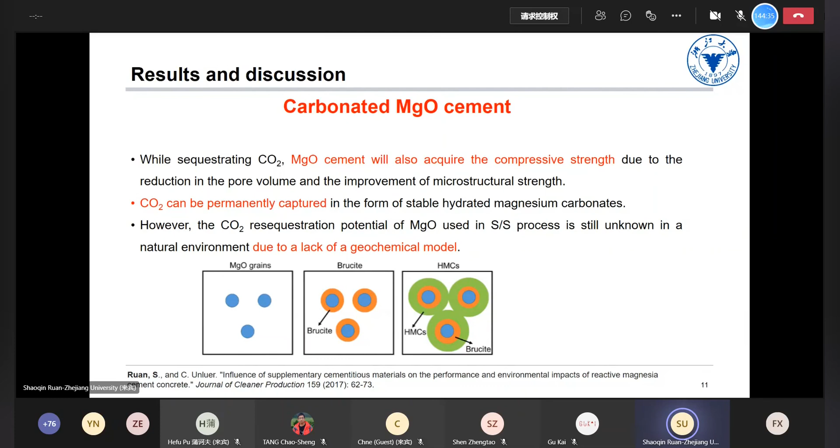You can see from this figure, the MgO will first react with water to produce layers of brucite on the surface of the particles. Then it will further react with carbon dioxide to produce the HMCs, called hydrated magnesium carbonates. This fills the pores and leads to strength improvement.

Previous speakers also mentioned MICP. MICP is also a quite popular research direction in this area. It uses bacteria and calcium-bearing salts, like calcium chloride. Previously, we also conducted some research on the use of MgO in MICP. We introduced reactive magnesium cement and bacteria, which produce hydrated magnesium carbonates to solidify the sands. The results are quite good, and I think it is a very promising field.

Then there is the magnesium silicate hydrate cement. Magnesium silicate hydrate cement can be synthesized by the reaction between MgO and a silica-rich source, such as microsilica and rice husk ash, in the presence of water. Sodium hexametaphosphate, instead of PCE, is used as a water reducer. However, using this water reducer may add additional environmental loads to the MSH binders.

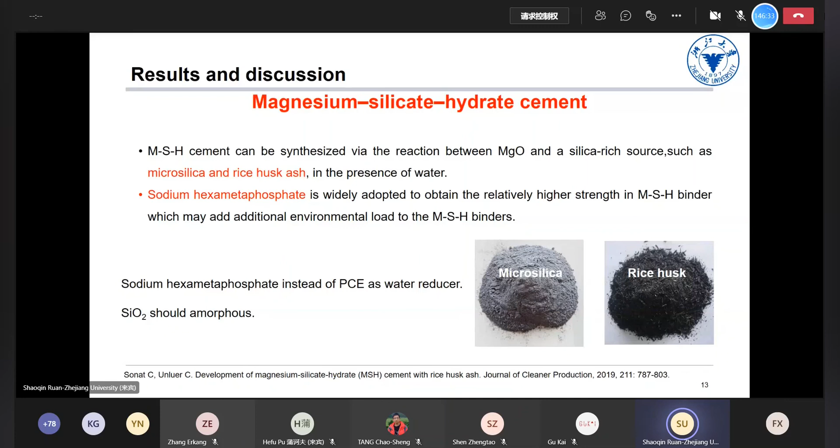In terms of solid waste, researchers normally use microsilica. However, some researchers also use rice husk ash as the solid waste to produce M-S-H cement. However, this silicon dioxide should be amorphous; if it is crystalline, the strength of the MASH is quite low, so it may not be very effective in SS.

Then is the magnesium oxychloride cement, and we call this MOC. MOC is a type of non-hydraulic cement formed by the reaction between MgO and magnesium chloride. Several very important phases, like phase 3 and phase 5, are the major products formed at ambient temperature, which contribute to the fast hardening of the cement paste.

There's a study showing that over the past 15 years, carbon dioxide will be further recaptured into the MOC. It is found that the rate of carbon dioxide capture is about 0.07 kilograms per square meter of sample per year, accounting for 20% to 40% CO2 resequestration owing to natural carbonation over a 15-year time frame.

So this equation is about the carbonation of MOC. So when you perform an environmental assessment of MOC, its carbon dioxide capture potential should also be taken into account to make it a more comprehensive evaluation.

Then there is the magnesium phosphate cement. Actually, we conducted several studies about its feasibility in 3D printing, and found it's quite effective because it is rapid setting. MPC is also a type of ceramic formed via the reaction of monopotassium phosphate and MgO, and the produced crystal structure is this one, struvite, contributing to the rapid strength development in binders.

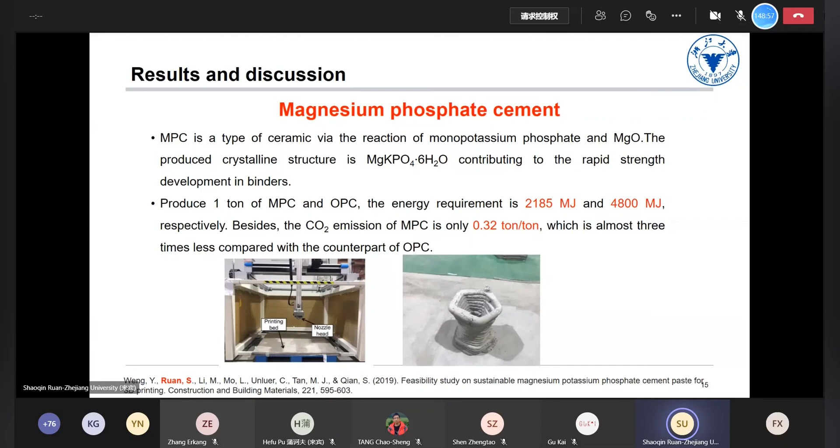To produce 1 ton of MPC and OPC, the energy requirement is quite different, and the energy requirement of MPC is much lower compared with that of OPC. The carbon dioxide emission of MPC is also only about 0.32 ton to produce 1 ton of MPC, which is almost 3 times less compared with the OPC counterpart.

Then there is the magnesium oxysulfate cement, which consists of MgO and magnesium sulfate. I performed several evaluations regarding the overall sustainability of MOSC and OPC, and we found that the ratio of MgO to magnesium sulfate is irrelevant to the final environmental impacts; they're quite similar. And the overall sustainability of MOSC is comparable with that of OPC, which means it is not quite sustainable.

In terms of carbon dioxide emission, an interesting thing is that the production of MOSC emits much more carbon dioxide compared with OPC, which means if you want to achieve the goal of carbon neutrality, you should not use MOSC. Instead, you should use OPC. Maybe it's cheap and it is widely used. So MOSC may not be very favored in terms of carbon dioxide emission.

Then there is the calcium sulfoaluminate cement. As I mentioned in the previous slide, in OPC production you need to calcine the limestone, that is, calcium carbonate, which emits a lot of carbon dioxide. But for CSA, a source of sulfur is needed in the manufacturing process, and an additional source of aluminum oxide is required due to the limited source of bauxite, which adds to the environmental burden due to mining and refining. So the sustainability of CSA is highly dependent on the local or regional availability of bauxite.

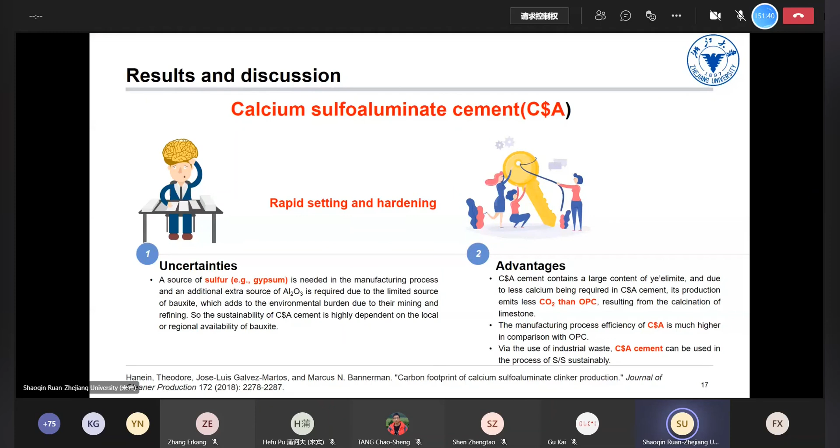Then here comes the question: is it sustainable to use industrial waste in S/S? So I have some critical comments. First, some industrial waste may actually be quite radioactive. Fly ash is widely used, but in some cases, some fly ash may also be very radioactive.

And red mud: nowadays I know there are a lot of publications regarding using red mud in SCMs, but according to our preliminary results, red mud is quite radioactive. It cannot be used solely. It may be combined with other binders, but in practice, it is very difficult to judge whether this type of red mud is radioactive or not. So I think currently it is of great importance to assess red mud in advance in practice.

Another thing is allocation, the allocation of environmental burdens. As we know, PFA, the fly ash, is the byproduct of electricity production. And GGBS, or slag, is the byproduct of pig iron. But actually, it is not very fair to consider PFA or GGBS as pure industrial waste, because if you produce a lot of electricity, it will give you a lot of environmental burdens.

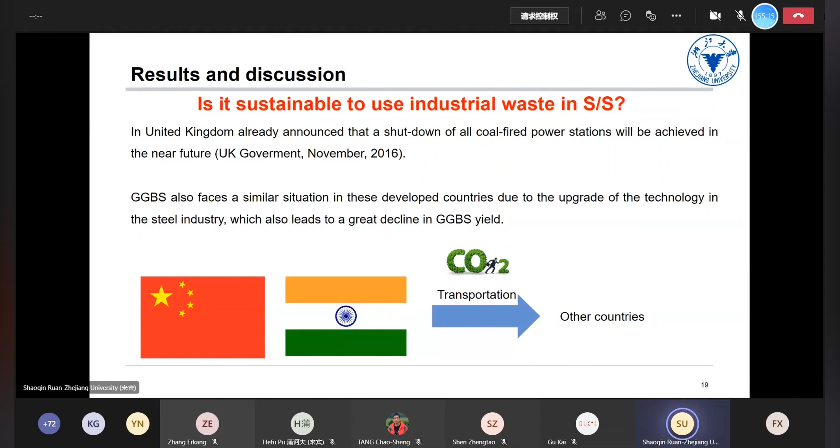Ruan, you have 2 minutes left. Okay, almost finished. GGBS also faces a similar situation in these developed countries due to the upgrade of technology in the steel industries, which also leads to a great decline in GGBS. So nowadays, China and India are the major countries that produce fly ash and GGBS. So if you want to use these materials in other countries, the carbon dioxide emission associated with the transportation should also be taken into account.